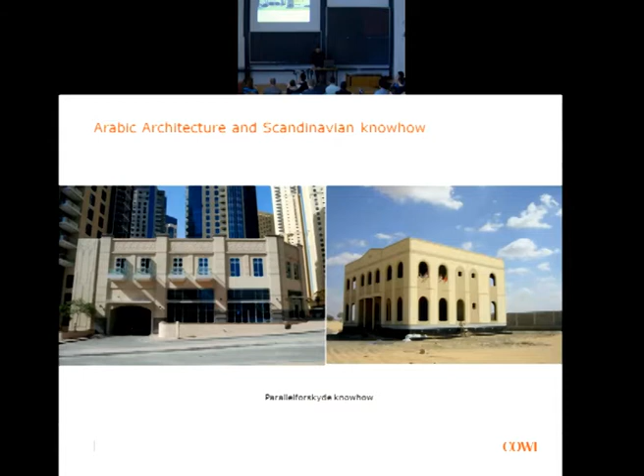When it comes to tall buildings, in the old days what did you use tall buildings for? Usually watchtowers, clock towers, control towers, churches and mosques, and also the Eiffel Tower.

If you look back in history, the tallest man-made structure was the pyramids, and that height record wasn't broken until the 1600s, I think by a church in England. Then you have to move a couple hundred years more and you get the high-rise in America, the Eiffel Tower, all these things coming. Now we see every other year that height records are actually broken.

But usually, if you look at the last 50 to 100 years, high-rise is usually a landmark, and it's usually happening in regions of the world where there is huge economic growth. If you take the States 100 to 50 years ago, that's where all the tall buildings were built. Then there was a boom in Southeast Asia, which went down to Australia, then came back to the Middle East, and now it's India and China. So all these places where you can see economic growth, that's also where we build tall.

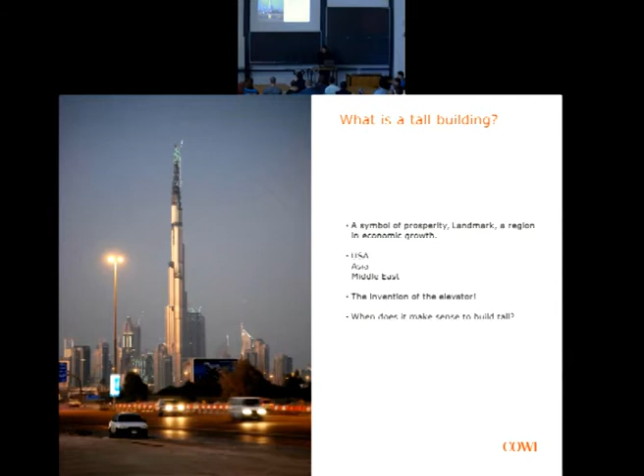When you do high-rise buildings, a great part of the innovation is in the structures. You cannot build a tall building on mechanical installations alone. You have to innovate and develop structural systems as you build taller and taller. So there are some fundamental things you need to be aware of and look at.

Again, if we go back to the pyramids and the churches in the 1600s, the structural system was all bricks, using the arching action. Then when you come to the industrial age in the 1800s, with the Eiffel Tower in the States, it shifted over to steel structures.

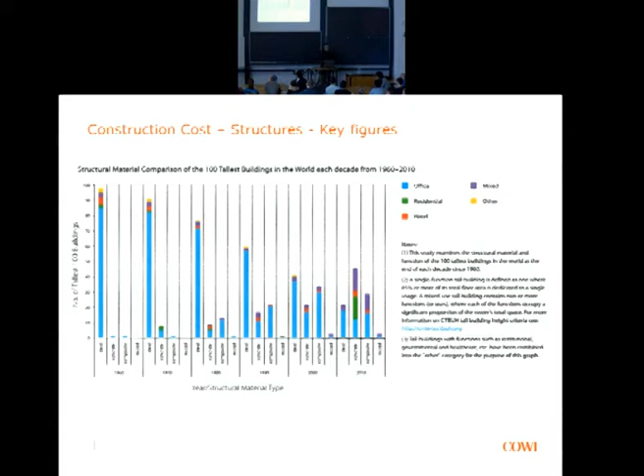A little paradox is that, I don't know if you've seen this video on YouTube where these Chinese guys built a 40-story tower in 15 days. That's a pure steel tower, but it's all prefabricated. Anyway, there's always something fun to look at on YouTube. But again, it was the Chinese who did it - not Europe, not Denmark, not America. It was all developed in China.

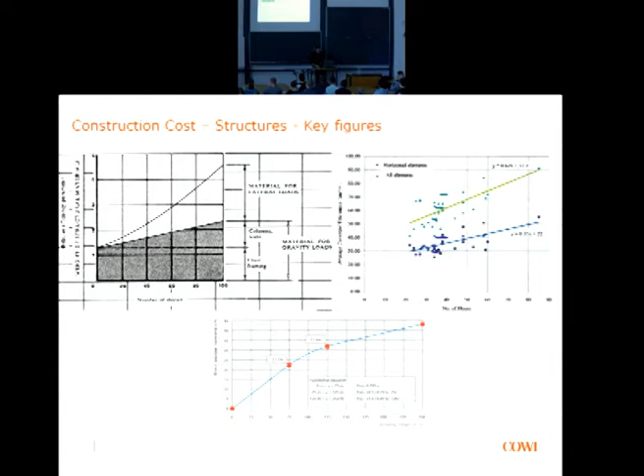Of course, we can discuss whether this is correct or not. But what we can see is that it is less effective to build up in terms of man-hour cost, because you have to go up and down and get materials in and out. So these are just the facts when it comes to structures and high-rise.

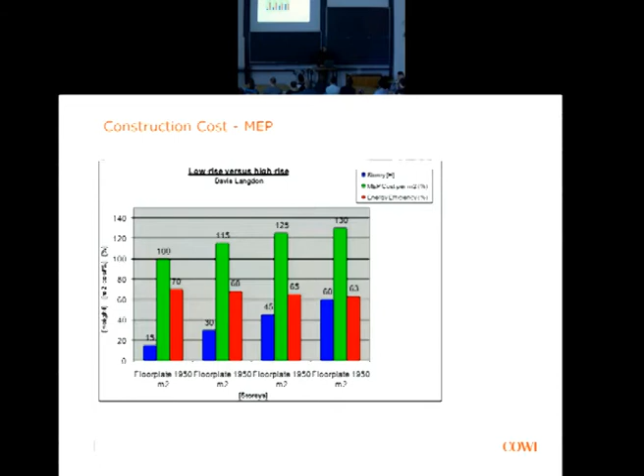So again, these are the facts we have to live with when we build tall. When it comes to high-rise structures, we also need to know the distribution of economy for the building - how much goes to structures, facades, mechanical installations, finishes and elevators. Usually it's about 25 to 30% for structures, facade, and MEP.

So when we do high-rise buildings, if we see these key figures going up or down - if it goes down, we've really optimized; if it goes up, something's wrong. So we need to keep these key figures in the back of our mind. And I would say, for whatever job you have in the future, you should always go back and reflect on what you did on the last job, or what can be done better.

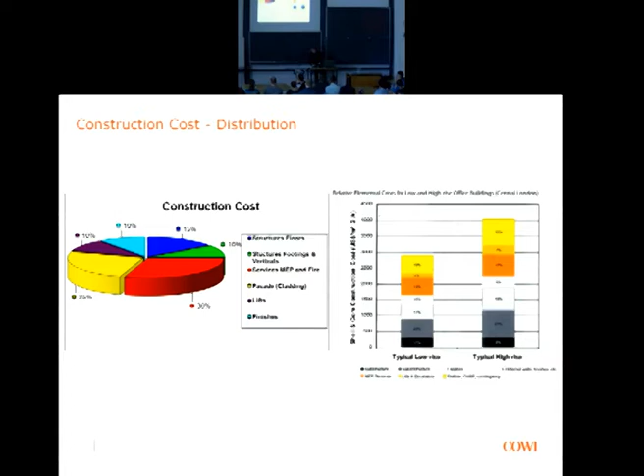So you can say, now we can just go home because everything is too expensive. You use too much material, too much energy, and you have higher operation costs. So what can we do about that?

This is what fascinates me about high-rise, that you really have to think. You cannot just do as you have always done. You have to think new, and you have to try to improve the way you used to do it.

For example, with the spans, don't take too long spans, get a good set out. I'll show a lot of examples of this later on, how to do it. Get out to see the world, get inspired, use known solutions, and also try to develop further.

But I'll try to come back now to, okay, why does it make sense to build tall? We know this, so now we can just go home and sleep because it's impossible. Or we can say, okay, then what is actually happening? Why are tall buildings actually being built all over the world, and how can that be economical and sustainable?

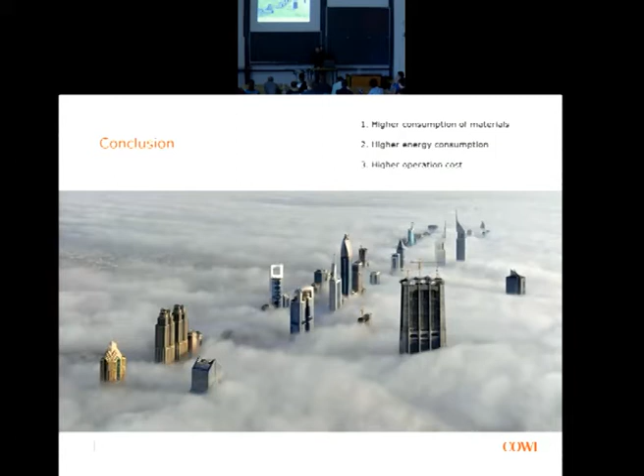I'll just show you this picture here because I was asked to reflect on high-rise and on Denmark, going back to the little presentation from the beginning about what we're going to talk about today. I'm actually glad I got this question, because then you can ask, okay, what are the signs of the time? What are we seeing right now in Denmark?

I think the last real tall building in Denmark was built in the 60s or 70s, and then there was one out in Ørestad, this Ferring. Then nothing really happened until a couple of years ago, when some other high-rise was finished in Denmark.

But what we see everywhere in all the municipalities is that town planning is now identifying areas, zones, where they're actually allowed to build taller. There are many projects out there in Denmark which are under development right now.

Because a lot of people think that high-rise buildings are ugly, and that they smash the city. But does this one look ugly?

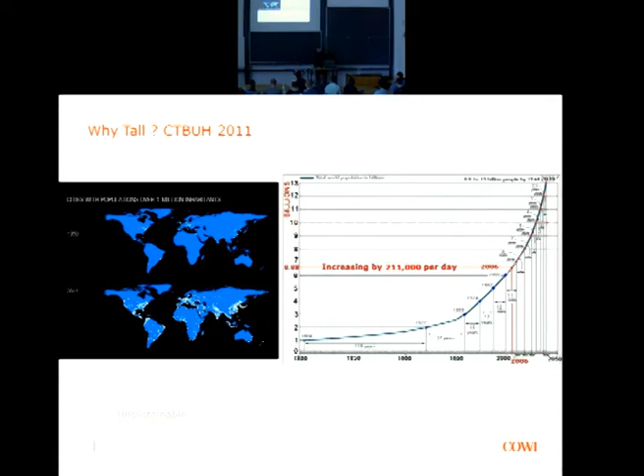So if we have to be 10 billion people on the planet in the future, we all want to live where the soil is fertile. We don't want to live in a mountain, we don't want to live where it's bad, so we have to live close to where we can produce food. And that's good with cities, right? Because people move into cities and we still have resources with fields so we can grow food in the future.

So the tendency is that people will move to cities and cities will grow. If you look at it from a sustainability point of view, you have tall cities versus taking the city and splattering it out horizontally—then we would all have to commute like this. But what happens when people come closer together is that you actually get more effective. If you live close to where you work, if your children go to kindergarten close to where you work, if all of this is correctly planned, then you can actually have a sustainable, high-rise city.

All this is taken from the CTBUH conference from last year. There was also one in 2012—I didn't go there, but the topic is still the same: how do you look at this in the future so we can become more sustainable and effective, and still have food for all these people?

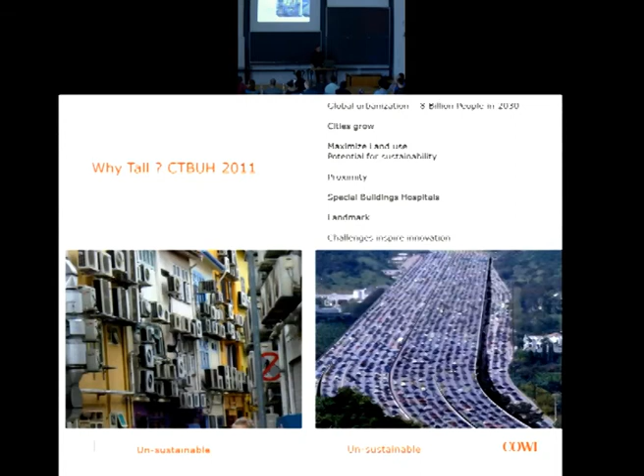I think this is one of the reasons why to build tall. Of course, in Denmark, I don't think we build tall just because we want nice buildings, and not because we have that big pressure on city size right now. But this is what is happening outside of Denmark - this is actually the reason why China is building all these suburbs only with high-rise buildings, simply because the pressure on the cities is so big with population.

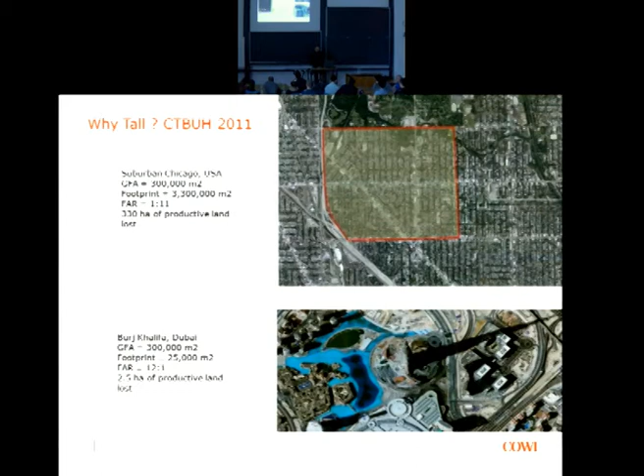If we then go into detail and ask what is the difference between high-rise and low-rise buildings, because that's usually what we need to discuss - in this book here, the CTBUH, they have all these definitions. One definition says if your aspect ratio is more than 1:5, you can classify it as a high-rise tower. If it has more than 20 floors, that's another definition.

Another is if the building is so slender that it starts to be susceptible to dynamic loads - usually if you have a frequency less than 1 hertz, then you need to look at dynamics. All these things are how you classify high-rise buildings. But there's a lot these buildings have in common - for example, because you build tall, all your loads become a lot bigger, so loads on foundations and columns are bigger than for low-rise.

Then there's fire engineering. In Denmark, there's a rule that says if you have to go more than 22 meters up, the ladder from the fire department cannot reach anymore. I think it's 45 meters in Germany - it's different all over the world. But the concept is that as soon as you reach over this limit, all fire evacuation and firefighting has to happen inside the tower.

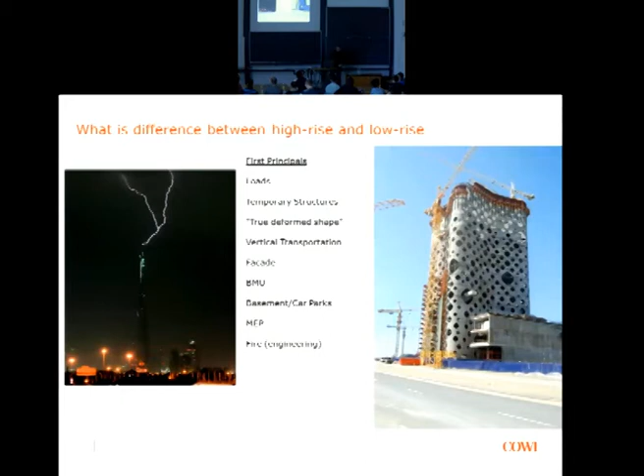If we go into the things here and ask what is the difference, for example, with facade - why is this all of a sudden such a big difference between high-rise and low-rise? That's because buildings move, right? A little building does not move that much horizontally and up and down, but high-rise buildings do move - when there is an earthquake or wind load, the building will stand and move.

Sometimes it will move in 2 directions at the same time, and it will also move this way because you have different loads on different levels as you go up. Then you can also have what is called differential settlement - say if you have one column in the corner which is less loaded, and another column next to it which is more loaded but the same size, then you will have a differential settlement which plants all the way up through the tower.

So all these effects, and of course temperature and tolerances, all need to be looked at. You need to detail everything around how to fix your facade to the superstructure. I'll come back to some examples of how we built here in Denmark and the challenges with this, because we built a little different than normal high-rise buildings.

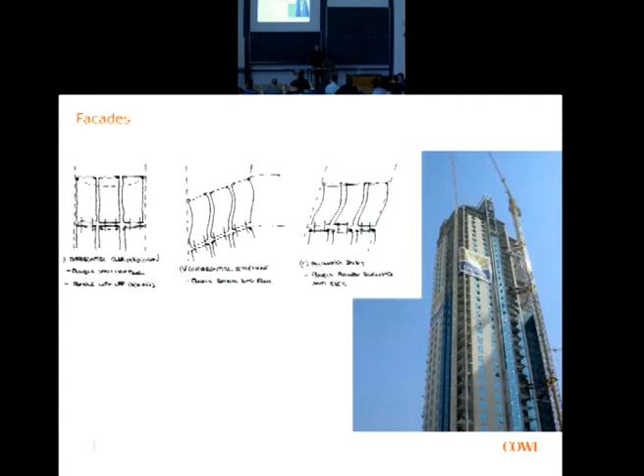So this is a big issue, and it has to be dealt with every time. Outside of Denmark, few Danish consultants have this discipline called facade engineering. It's a discipline and it has to be respected, because there's a lot of things which need to be thought about: how to connect the walls, make sure fire, noise, everything is taken care of.

You can see it on a lot of buildings around afterwards. All these things you can see, that's the BMU, there's everything.

So what's always done on high-rise buildings is you make what's called a vertical transportation study, which is like a traffic impact study, similar to when you drive and the queue starts to come, it gets red, it gets green, other cars come, and you look at the peak. For example, on some super tall towers you can have hotel, residential, and office, or whatever, and they have different peak hours where people go in and out of the building. So you do a vertical transportation study to try to optimize the elevators, the amount of elevators, their sizes, and their speed.

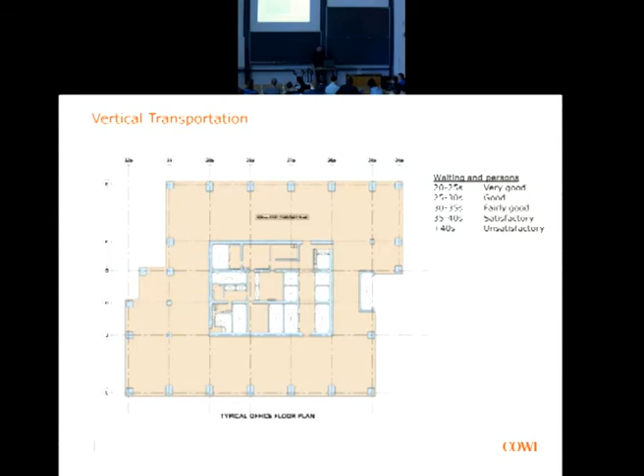Then we have the mechanical strategy, which is all the mechanical installations: air, plumbing, gas, heating, cooling, everything. I'm not a mechanical engineer, but of course there has to be a close dialogue between the structural engineer and the mechanical engineer. There are different concepts which are usually decided very early in the schematic stage.

The first decision is where you want to put your main mechanical plant rooms. In many towers you will see them at the bottom and at the top. In some other towers you will also see intermediate plant levels, and usually that level can serve 10 floors up and 10 floors down.

Of course, the downside is that you cannot sell these areas in the middle, but it gives a very efficient solution - if you're a mechanical engineer, you will say this is the most efficient way to do your strategy. So it's always a trade-off between the cost of the mechanical systems and what you can sell.

So a lot of optimization has to happen with all the shaft sizes, over and over again, until you know you've actually made them as small as possible.

If we come back to structural engineering a bit more, one thing that's always very important when we do high-rise buildings is understanding what happens with the wind. At the top you can see some sketches about what typically happens on tall buildings when the wind hits the building.

You have this effect where the wind comes down and you get turbulence. In some books it's called a downwash effect. That's just how it works.

So what is always done is a desktop study - you can do this in a computer model - finding out how the wind environment is around the building. Where should you not put your door out of the building? Where is it good to do it? Where is it good to have a balcony? All this depends on the local wind environment.

Then you have actual wind tunnel testing, which is done every single time. First of all, you want to know what's actually happening with this geometry of the building. Second, the results from a wind tunnel test will always be about 25% less than what is prescribed in the codes. So there is also a benefit from doing this.

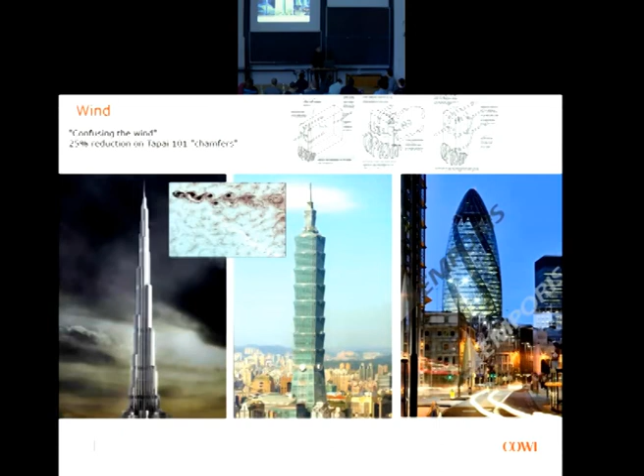So that's that one. When we go further into the structures here, what's fun about high-rise structures is that you really need to think about buildability. Every time you make a line or decide something, it has a consequence 50 times or 40 times over. So you have to really think about whether this is the right solution for the whole building.

I'll just show some of the usual things. When we have high-rise buildings, we always have shoring, which is needed to build the foundations, slabs, columns, and temporary structures.

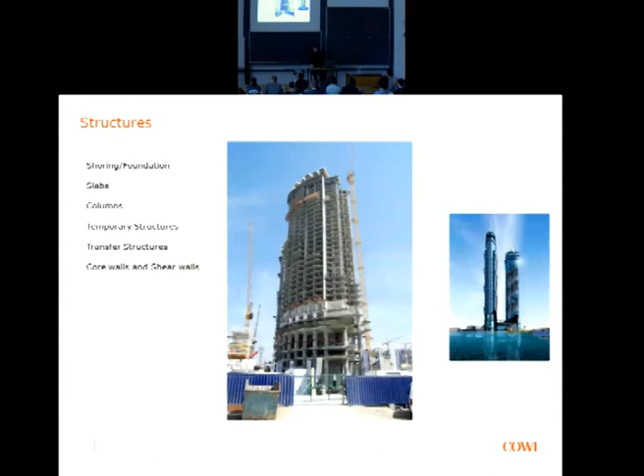Just a little mind teaser on the Burj Khalifa: when there is an earthquake and a wind load, there is actually never tension in any members - there's no other way around it. There is always compression everywhere; there is no tension in the building at all. I saw a statistic the other day that there are 150 towers in Dubai built over the last 10 years, and I haven't seen one single tower which has any vertical post-tensioning. Not at all - it's only something we do here in Denmark. We can come back to why we're doing it, but it's good to go out and see what's done in the world, get a grasp of how they do it out there, and then bring it back home.

The usual thing with towers is that you have very big loads on your foundations. You can see the foundation, for example, where you can actually walk inside to inspect your reinforcement. And you will always have bored piles - a bored pile of, say, 1 meter or 1.2 meters can take 10 times as much as a Danish driven pile. Loads will be big, like 50,000 kilonewtons in a column. So if you have 50,000 kilonewtons in a column and take a Danish pile, you'd need 50 piles. That's why bored piles are used when the soil cannot take the load alone.

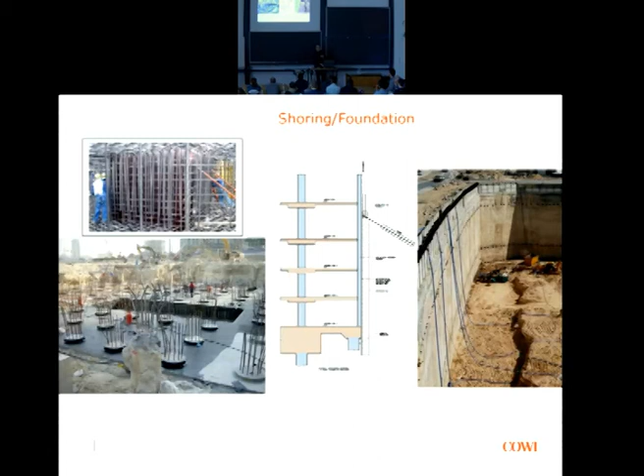This basement here is 6 stories deep, because it's about density of population - you'll have many people there, therefore many cars. So this is a thing you'll always have with high-rise: the basement and the car parks.

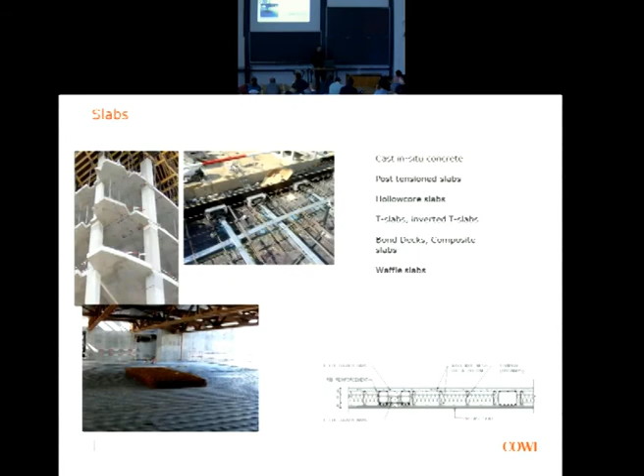Then we have the concrete slabs, which can be done like here in Denmark with TT slabs or hollow core slabs. But what's very popular is post-tensioned slabs, using some bridge technology - remember what I said about synergies from different countries and between different services and skills. If you take bridge technology and use it for your slabs, you can see the strands and cables. You can usually span up to 8 meters in both directions, with a slab about 200 millimeters thick and no beams dropping down. This means nothing increases your floor-to-floor level when coordinating with MEP. This is a very popular system for a lot of buildings.

When it comes to columns, it's a little bit the same again. It's the usual things we have, but one thing which is important to understand is that mostly all columns, especially in the bottom of the building, what is governing for calculating the size of the column? It's actually just compression. The moments are not that big. So you might as well just say, what is the compression? And then you find the size in the concept stage.

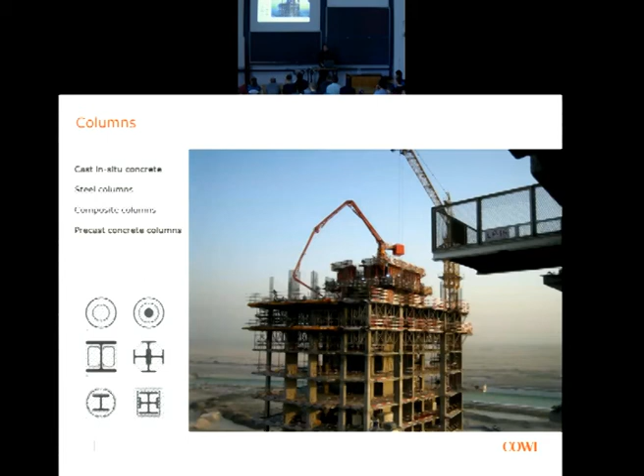And if you use these composite sections as an alternative to either concrete, then you can further decrease the size of your columns. Of course, they're a little bit more expensive, but you get more space.

Now we come to some of the funny things about a high-rise, and that is transfer structures, which is just like building a bridge up in the air. Usually, because you have this transfer structure here, that is just an architectural hole in the building. I don't think it has any purpose other than architectural.

But you will have typically challenges in high-rises when you have mixed use. Say you have a car park in the bottom, then you have residential. What happens to all the columns when they go down into the ground? Maybe it'll screw up a whole car park. So transfer structures is a very, very typical high-rise phenomenon which we have to deal with.

Usually the columns which are standing on top of a transfer structure is called a floating column.

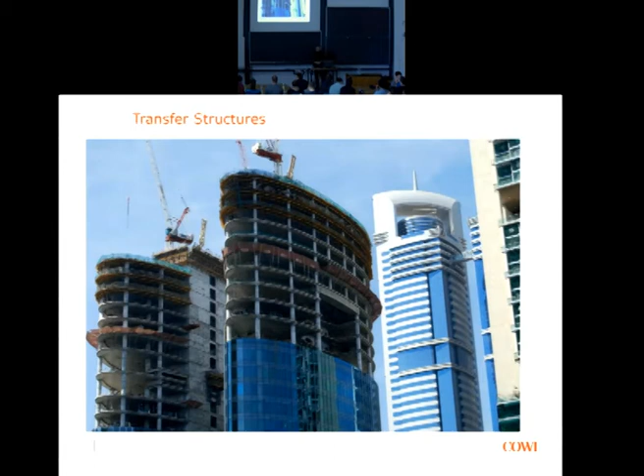How to model this is a trick, because your load and your stiffness will come as you build the structure. You cannot just build your computer model, turn it on with gravity, then your design forces will be wrong. So you have to get the program which can actually deal with this. You model it just like building a bridge out, cantilever from both sides. When you then hit each other, all of a sudden it gets different. Maybe it's pinned in both ends, but you will have some stresses which are already there. So you need to have the correct software to model these things.

I'll just show you some funny ones here where this is an architect who have drawn some lines on a drawing. This is just to show you the consequences of lines on a piece of paper, and then afterwards you have to build it.

If you take the first one out there, it looks nice with this bridge hanging up there in the air, but you have to build all this temporary scaffolding to carry the wet concrete while you are casting. It's a little bit the same - you can see what's happened on the other tower here. I'm sure that on the architectural drawing it looks nice with this little thing coming out here, this little building. It does look nice, and you can see it afterwards there.

But at the same time, remember in the beginning we said it's expensive, it takes too much time, we have to think. For both of these towers here, what is the problem with this one, for example - and also the first one - you see the car park which is there in the bottom. You cannot finish that before you come to the top of the tower. So it's just standing there and you can't finish on your time schedule. You cannot finish the building, and that is costing a lot of money.

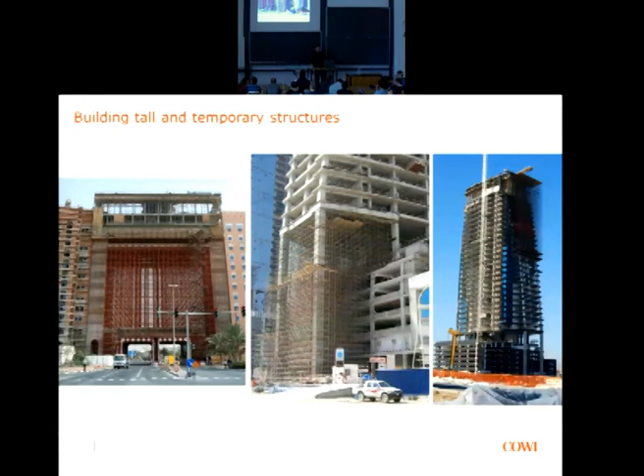So to do things right will also help, first of all, to save a lot of money, but also to make high-rise more acknowledged. Here are some other examples of some transfer structures which are finished - one with the hole in the middle, and then there's one here at the harbor front where you can see a whole building standing on a huge transfer structure coming out there.

The one with the hole in the middle is actually done in stages, because it's a post-tension beam. If you post-tension it for all the load, it will actually destroy. So it's post-tensioned in stages. When you start loaded, then you post-tension more and more and more.

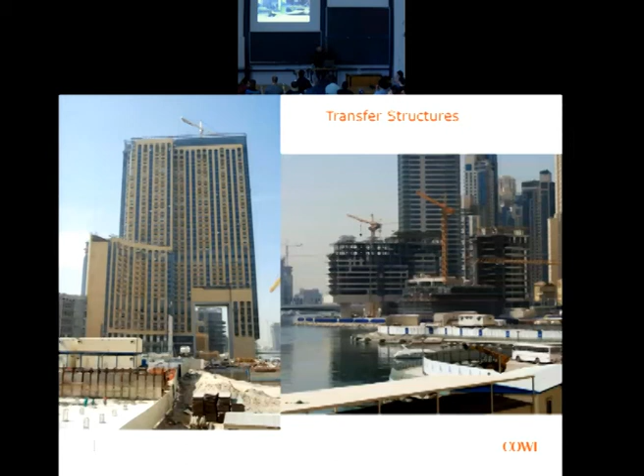So when you come to the top, it has the right stress level afterwards, a little bit like a bridge structure. There's a lot of similarities between bridges, tunnels, marine structures, and high-rise buildings. It's the same way to do the foundations - big concrete structures, a lot of similarities. Some of the best high-rise contractors I've seen actually have a bridge education, so it comes easy for them to think big.

If we look a little bit on geometry for buildings - remember in Denmark our tall buildings are actually ugly, right? Because we think all Russian old buildings look like that, but it's easy to make them look nice. It's not that big a difference, it's not that difficult.

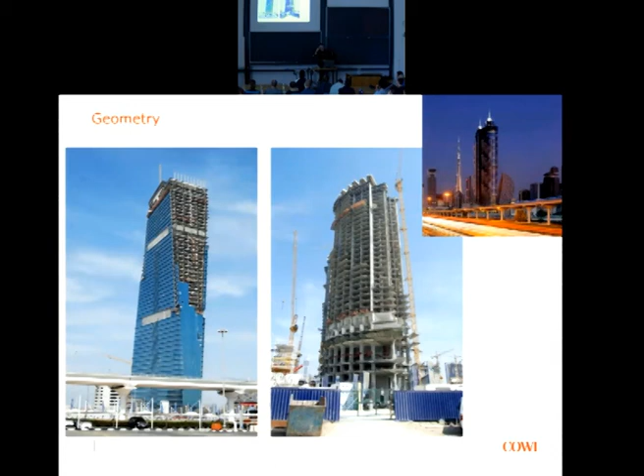Then you have the other one - I think this tower opened yesterday, it was the world's tallest tower, these two here. I think it was originally Emirates Airlines, I don't know if they still have it. There you can see they're playing with these slabs sticking out. The columns are vertical, but the slabs are just cantilevering a little bit out, and you can see on the facade that it's just cladded afterwards. That's a very buildable way to do it, whereas the other one is a little more complicated because every beam reinforcement, every column reinforcement is different, because it will have different loads, different lengths. So there's a lot of coordination you need when you build the building afterwards.

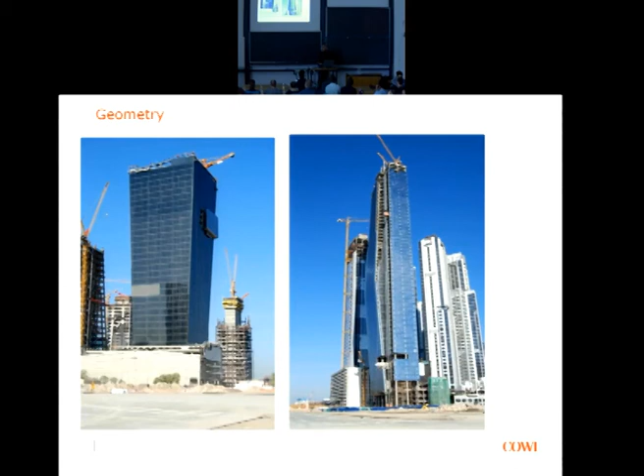Here are two other principles, where the columns are sloping nicely out to shape the buildings. I think both of them look actually very nice, these two buildings. But what you can see in the bottom is how already the car park stuff starts to come in, and that's just usual. Architecturally this is a big challenge to figure out how to make that look nice, because I'm sure the architect doesn't like all these car parks, but it's a challenge every time you have a tall building - there's a lot of people there.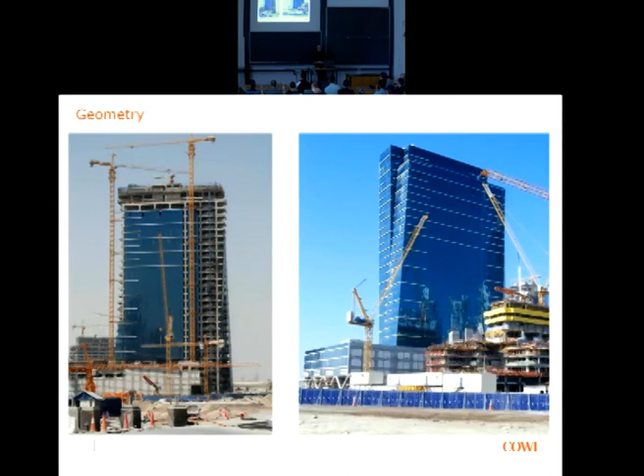This one here is actually one of my favorite towers. I have not been involved in it myself, but I like the simplicity of it. See, the columns are all running vertically down, so we have a nice, clean load path all the way down. Then the slabs in the bottom start cantilevering out little by little as you go up - very, very easy to build this one. And I think what they get out of it, this tower doing like this, it doesn't look like it should be so simple, but I think this engineer has really thought out a very good structural system, a very simple way to make the architect's dream come true. That's also what we have to do as engineers.

This here is one of our own towers in Bahrain, these 3 towers - actually we have about 10 towers we've done there. This is called Villamar Towers. I forgot to say one thing before about the core - a good structural engineer and a good mechanical engineer, when they sit together, the core walls will take up about 20% of the floor plate. That's a good key number. On this one, it's about 30% to 35%, the core size in the middle.

The reason for this is that you can see how the tower is actually twisting up, and they're twisting the same way, all the columns.

So that means if I have a column like this, and I have a load like that, I will also get a load which is horizontal. So each floor plate is trying to turn, so you're actually trying to screw the whole building down into the soil. To prevent this, you need something which can hold back, and therefore the core is a little bit bigger. I also think there's sometimes a frame running around the slab edge, but again, this is the architect's vision, and if the money is there, we should help with that.

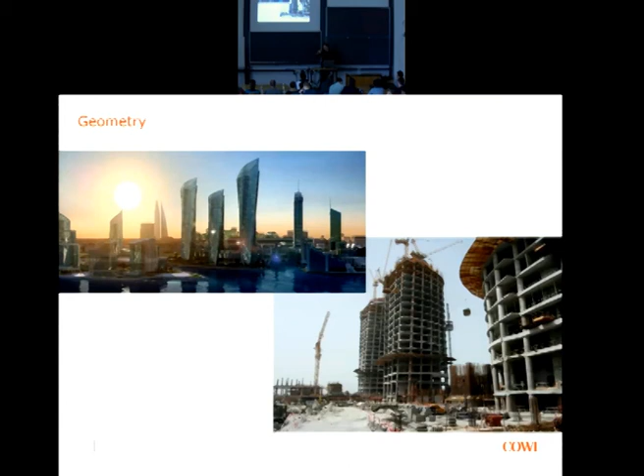One funny thing you can also see here, if you look a little bit further down, you have all these safety platforms. This is usually also one of the things where if you want to work underneath where there's something happening on top, it is actually possible, but you just need to do it right and take the right precautions.

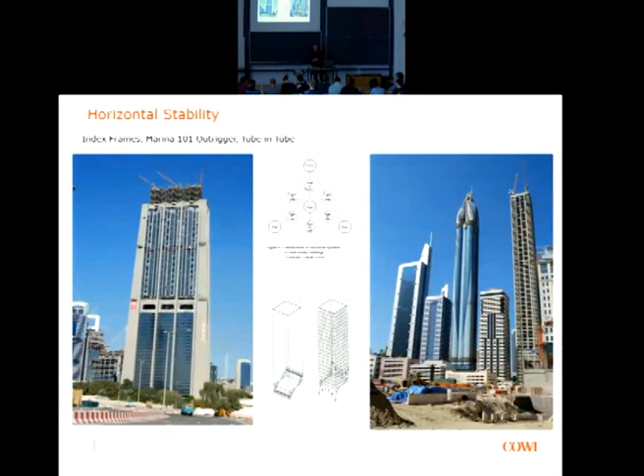So for these towers here, which is very, very non-Danish, you try to make the outer skin work together with the core walls and the shear walls. I'll give some examples about how to do that.

First of all, when you have a building, all of you who are structural engineers know this, that the building has to be stable. It needs to have walls which can take care of the loads. That's fundamental. And then the next thing we need to do is put a core in the building. The core—a lot of architects ask me, okay, how big is your core? I don't know. It's your staircase, your elevator, and your mechanical. Then we put the wall around. So that's always what gives the size of the core.

And of course, if the core is in the middle, the building will not be so susceptible to torsion. It will have very, very good load paths for wind load, also for earthquake. So if you start to shift the core away from the center of gravity, you will punish yourself with torsion. Plus, if you put it all the way outside, there is no load on it, so what's going to take care of the shear? So therefore it's good to put the core in the middle, so you have gravity load from the slabs there, and avoid the torsion.

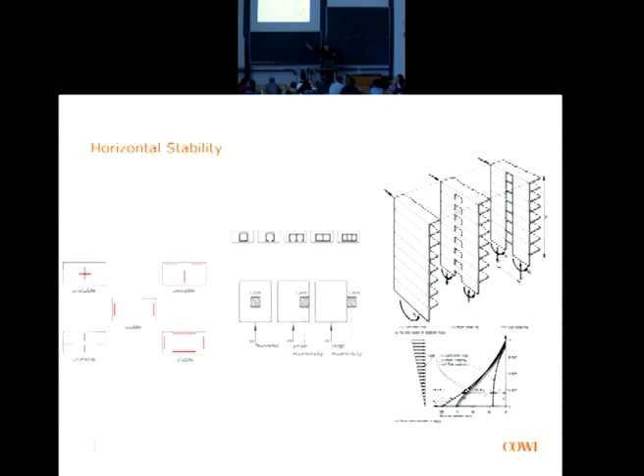But if you look at the front one, say we have one wall and another wall behind it with the same geometry, but they are not coupled together, what happens? What is the moment capacity of this wall? If we call the first one 100%, and put the same force at the top, you can see the last one falls from 100 down to 20% moment capacity, turning over.

But if you connect them with these link beams you see in the middle, the walls are connected with what are called link beams, one over each opening, it actually comes back up to 75%.

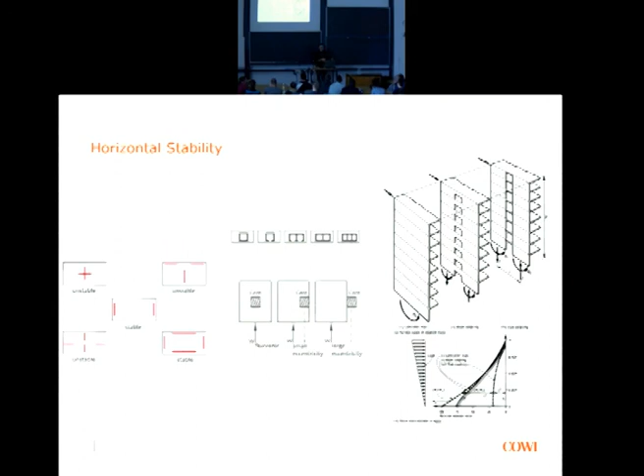These are concepts and principles, but for all high-rise buildings you will almost always have something called link beams. You want to couple the walls with each other. Again, it requires the right software. It's not rocket science, it's quite easy, but it's one of these things you have to get in. Core wall size, okay, there's an opening, then we couple it with these link beams.

Next, when a shear wall deflects out, it's a bit similar to a beam deflecting, it will always look like this. So we can put it up again, and then it's just a shear wall.

A concrete frame, if we take out the shear wall, will be more like an S-curve. So you have the frame and you have the shear walls. When you start putting these two together, the frames and the shear walls, that's how it's almost always done.

You get a very, very good structure for stability. I found this little example here from a guy at a company called AECOM in Southeast Asia, who built a model and said, okay, if I have a frame alone, a shear wall alone, and then I combine them, what do I get out of it?

So we can always say, if I have a shear wall or a frame, I put a load and measure my deflection. What can we call this? We can call this stiffness, right? This is Hooke's law, F equals K times X. Then we measure what the stiffness actually is.